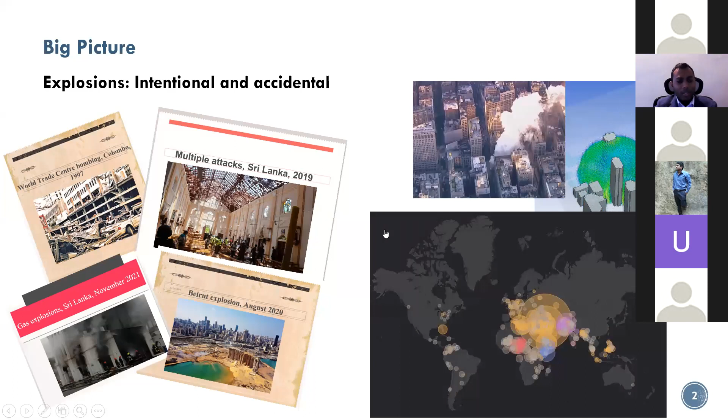For one thing, explosions have become a very common occurrence. Some of it is intentional and some of it is accidental. And us Sri Lankans are no strangers to both these types. I've just put some of the headlines of events we have experienced in Sri Lanka. Of course, the last one, the Beirut explosion, is abroad.

As a nation, we have experienced, in some cases, intentional attacks - carried out with the intention of causing harm to structures or to people. In other cases, there are accidental explosions that are not planned but could still cause significant damage. For example, some of these gas explosions we are hearing of nowadays are accidental, and also the Beirut explosion, based on what has been reported, was an accidental explosion as well.

So it can take either form, but as this video playing in the bottom right corner is suggesting, every year there are a lot of at least intentional attacks all around the world, causing serious fatalities to man.

Continuing with this idea of the big picture, it can cause serious damage to structures. These structures - when you think of blast, you might think this has to do with military structures. But as I told you in the previous slide, in today's world, blast engineering is not limited to military - it's very much a part of, if I could use the word, civilian life.

For example, the trains that we travel, once again, we have experiences in the past in Sri Lanka, and even some of the critical buildings, once again, not anything new to us. An explosion in one of these could cause serious injury to people, as well as catastrophic failure of structures.

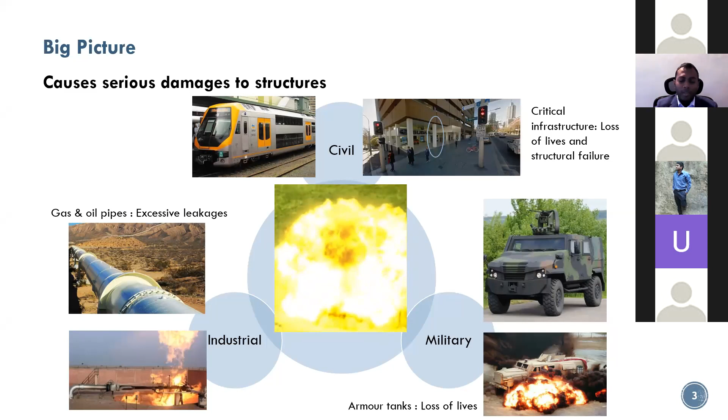So as you can see, if there's an explosion in any one of these structures, and of course the list can go on, it could be quite fatal, and it can cause serious damages to structures. And of course, it's not limited to structures. We as engineers, our main goal is to save humankind, and in doing so, we want our structures to be safe.

An explosion can cause serious fatalities to humans. Broadly speaking, we categorize the fatalities into two categories: primary and secondary. Primary is to do with the immediate explosion event, I'll explain what that is in the coming slides, whereas the secondary injuries could be some of the after effects of the explosion.

The primary injuries are the major concern, but even the secondary injuries can cause serious damage. This is not only limited to military applications, although the two photos I put on this slide are military related. If there were to be an explosion somewhere, the extent of it is not limited to the immediate vicinity - you can feel it further away. So that is why it is important to understand what's going on when the blast happens.

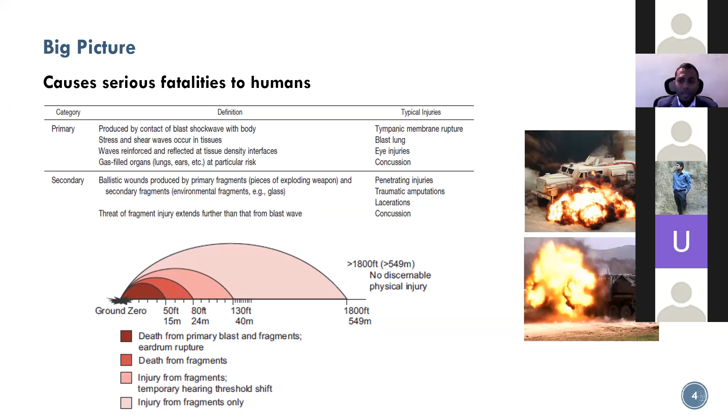To sum up this big picture, let me use an example of say a roadside bomb that could hit an armor vehicle. One thing that could happen is the structure - the armor vehicle itself can get damaged. This is the structural side of failure. Or the person or people inside the armor vehicle could be injured, or quite unfortunately could even be killed.

So there are two things we are mostly interested in when it comes to blast. One is the excessive pressure - there's a sudden rise in pressure when there's a blast, and that pressure can be felt by the people inside. That can cause harm to the people, and it can also cause harm to the structures. And secondly, there's a phenomena called scabbing, which is to do with damage to the structure.

When this happens, there could be particles that are ejected out of the structure, and those can act as high velocity projectiles - fragments that were not part of the initial blast event, but can contribute to the negative impact the blast could have. Both these aspects affect what's called traumatic brain injuries, commonly found in most soldiers, but even people exposed to blast can experience these conditions.

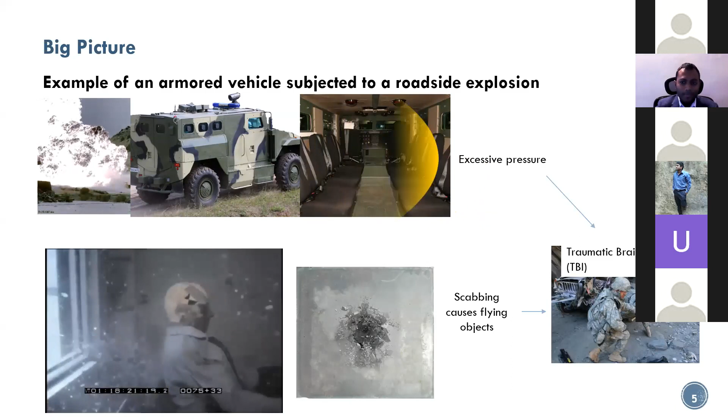From this point onwards, I'll be touching on that first point I mentioned about blast. So I'll be talking about how a blast occurs and what it can do.

Generally, the creation of a blast involves shock waves, sometimes referred to as blast waves - the terms are sometimes interchangeable. There's generally a violent change in pressure. Now, this is not only seen in blast - things like the three images I've given at the top also experience violent changes in pressure. But what we are dealing with in blast is a very unique situation. While all these things have that violent change in pressure as the common factor, what we see in blast is a very, very unique phenomena.

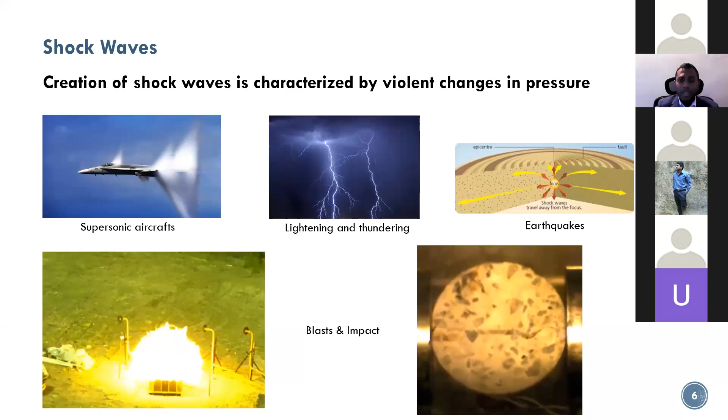So this is what happens in a blast basically. Firstly, there would be an explosion, or an ignition. Sometimes we use the word detonation. In the case of weaker explosives, we use the word deflagration. That just simply means that it starts. There is a blast.

The immediate thing that happens is there's an extreme rise in temperature and pressure. That's almost immediate, and it's very hard to even assign it a time. As you would see in the next slide, everything I've shown here in this flow chart happens within a matter of milliseconds. So it's very hard to assign a time to this.

So the sudden rise in temperature and pressure is then accompanied by the expansion of the gas. The air expands, and as a result, a layer of compressed air propagates outward. This is what we call the blast wave. So there's compressed air full of energy, at high pressure, that tries to move away from the source of the blast.

So this is what we call the positive phase, but this doesn't stay forever. There is a sudden rise, and then that effect decays. We say it decays exponentially, almost immediately. Because of the overexpansion of the air, there can be a reversal of the flow, and this is what we call the negative phase.

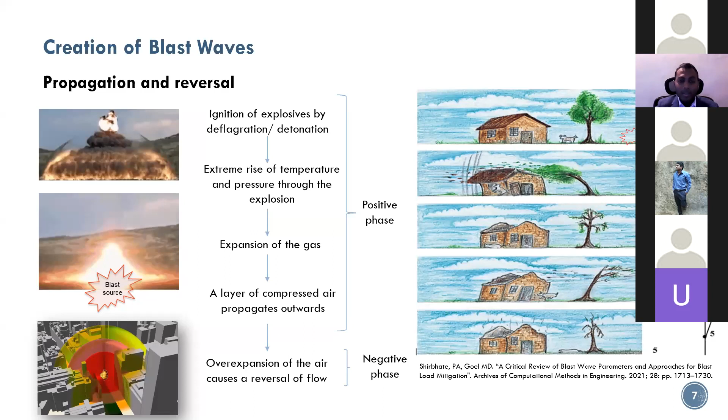So let me put that into a graph and bring in more engineering terms. Now I guess you have a fairly standard idea of what a blast can do. But now as engineers, if I can put that entire sequence of events into words: if there's a blast at some place, this is the pressure time history that you would see. The pressure is in kilopascals, with quite high values, and the time is in milliseconds. As I told you, this entire event happens within a matter of milliseconds.

So a couple of things that I want to highlight here. Before the blast occurs, what you have is the atmospheric pressure, or the ambient pressure. So for a few seconds prior to the explosion, everything's at that atmospheric pressure. And then there's a sudden rise.

On the horizontal axis, I call it the time of arrival. At a certain distance, within milliseconds, the blast wave arrives there. You can see in the simulation running in the left corner, that red contour, which is the high pressure, starts from the left-hand corner and propagates to the right. So if you think of a point in the middle of that figure, it will suddenly experience this rise in pressure, and that maximum pressure is what's called the peak incident pressure.

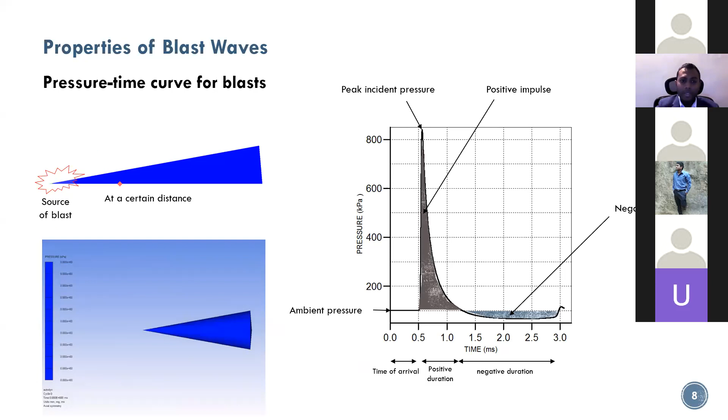Now this slide tells you - this is a real case. There are serious increases in pressure, and these are massive increases, depending on the quantity of the charge size as well. But one thing to do with blast that helps us is that with distance, there's a rapid reduction in that pressure rise.

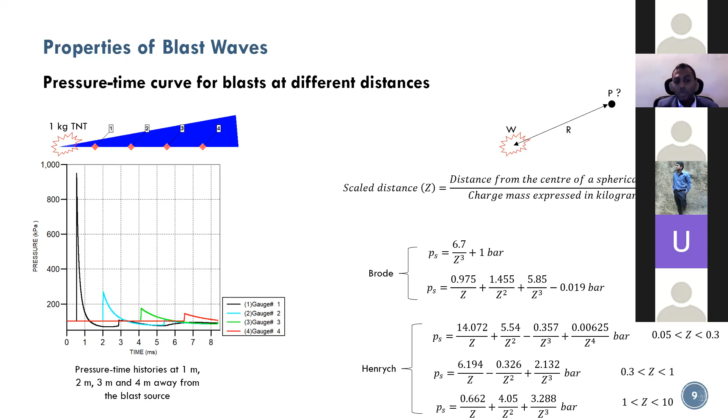So these equations are able to somewhat capture the effects of the pressure. Of course, there are shortcomings in these equations, but what I want to highlight in this slide is when there's a blast, there's a sudden rise in pressure, but the effect of it reduces or decays as you move away from the source of the blast.

If the previous peak incident pressure was bad enough, now this is worse, because reflections can sometimes be 8 to 10 times more than the incident pressure. In reality, unless the blast happens in no man's land, which is very rare, the effect of the reflections needs to be taken into account, and that can increase the pressure by several magnitudes. That's a critical thing we need to consider when thinking of a blast event.

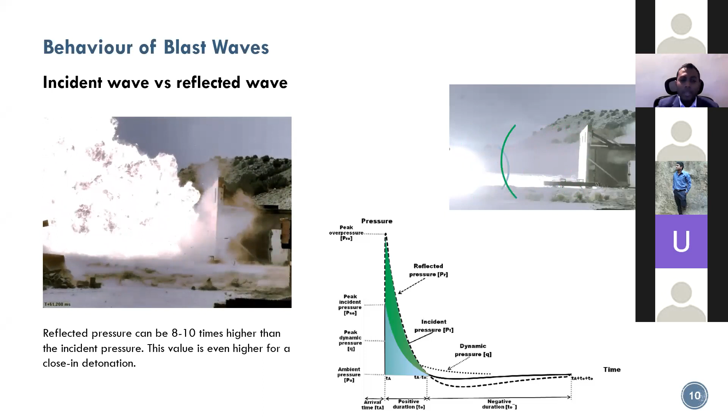So this is where the first part of it, the blast side of things, ends. I just wanted to give you a brief idea of what a blast is. My next area I want to touch on is how structures behave when there's a blast. I know there's a Q&A at the end, but if there's anything you want to clarify before I move on to the second part, I'm happy to do that now.

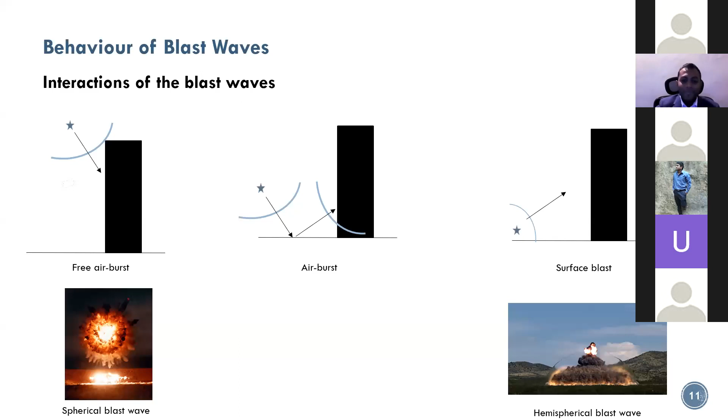By this point, you would have some idea of what happens when there's a blast. There's a sudden rise in pressure, but that pressure decays with distance. These are some of the key things we observe when there's a blast.

Now when it comes to structures, we've identified that there are pressures and impulses we can quantify during a blast event. So now we want to know how our structures behave when there's a blast event. To understand this, we first need to understand how materials behave during a blast, because structures are made of certain materials, whether concrete, steel, or any other kind of material. We need to understand what really happens inside a material if we have to accurately quantify the response of a structure.

Strain rate has units of 1 over seconds, or 1 over time. You can also explain it in terms of velocity divided by length for a given element. This is not generally used in static design because we don't have to deal with velocity in static design. Our load is static, as the word itself implies, so there's no effect of the strain rate.

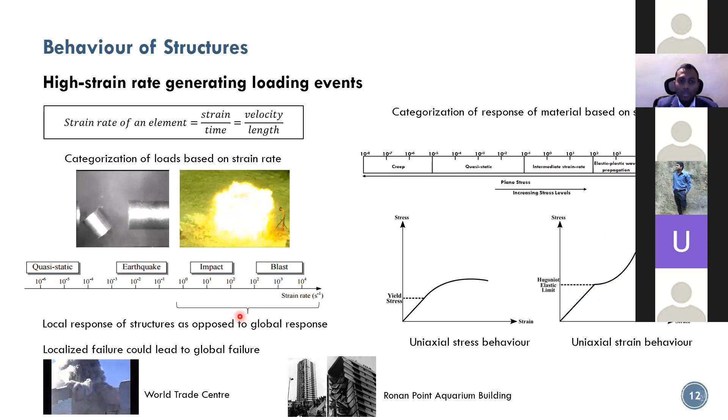This is something we commonly use for dynamic loads. Or we can use the energy theorems, because we know in a blast event there's energy that is dissipated as kinetic energy from the blast source, and this is absorbed as strain energy by the structure. By comparing the two, we can also do an analysis. But this is a very basic way of quantifying the structural response.

The question I want to leave with you all is: is this an oversimplification of the actual scenario? For one thing, we are simplifying the blast load—is this able to capture some of the complex ideas I told you earlier? Things like reflected pressure are very hard to quantify through this sort of model. This is where we actually need numerical simulations, finite element simulations, where we can model the blast event, simulate it, and see the full picture.

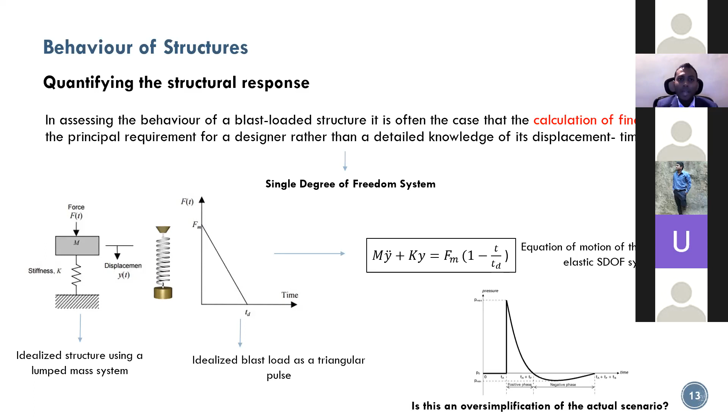Another key thing we want to know in terms of designing structures is how much structural protection we should offer a structure. Because there are two things about blast that make this idea of protecting structures very difficult for us. One is blasts are unpredictable. It's not like designing for static loads where we know the expected loads.

You can design the structure to resist, say, 1 kilogram of TNT, but the next day someone can carry 10 kilograms of TNT. So there's no guarantee that the structures we design are safe for any given blast scenario—the blast event itself is highly unpredictable. There's only so much we can do as engineers, so we need to accept that we can only offer a certain degree of protection, and we need to accept a certain degree of loss.

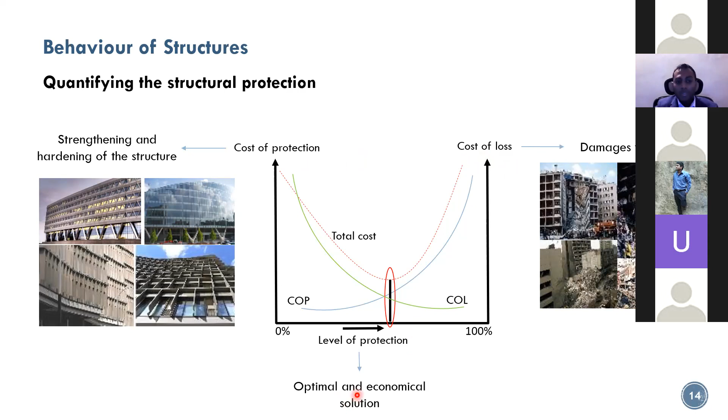We need to accept that there needs to be a certain degree of compromise between protection and loss, because there's no way we can offer full protection, nor can we allow full loss, since we are responsible for the structures we build. So it's important to quantify the level of protection we are going to offer to a given structure, and then we also need to quantify the structural integrity.

The resistance time relates to the natural period of vibration of the structure, and maybe even damping can come into play. So in this initial region, we are dealing with impulse, but as we go further away from the blast source, we are mostly interested in the pressure, because it acts for a longer time compared to the time it takes for the structure to resist it. This is important, because when doing a blast design, we need to know whether we're interested in the pressure or the impulse.

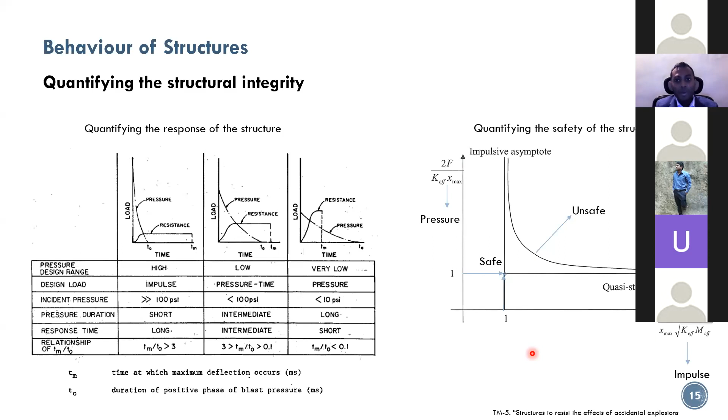So in terms of resisting, as I told you, I'll first deal with the traditional solutions. Now the idea of dealing with blast design is very important, as I've already explained the significance of it. So this slide is quite loaded with figures, but let me explain.

Generally, when dealing with blasts, you can broadly categorize structures into two types. One is barriers, where you expect the explosion to happen inside the structure, maybe because it is storing explosives, or, as with recent events in Sri Lanka, there may be gas explosions inside. So effectively, our structures are to be designed as barriers. When dealing with barriers, we are dealing with internal explosions, so there could be internal reflected pressures. We need to make sure we design our structures to resist that, and to this end we generally have this idea of vented structures when designing barriers.

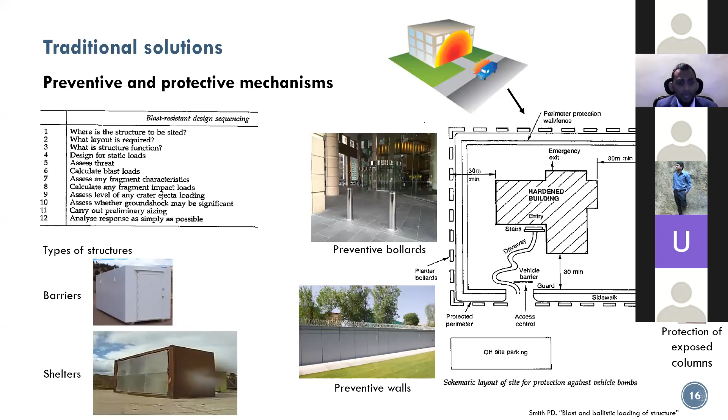So this is where I'm going to enter into reinforced concrete structures. We now understand that we need to decide what the function of the structure is, and the most commonly used material when it comes to building our structures is reinforced concrete. Generally for blast engineering, reinforced concrete structures are preferred - I'll show you why in one of the later slides.

Now the material behavior under blast loads is also very important. I showed you earlier the accurate description of the material behavior - it's the uniaxial strain condition, that's where the stress suddenly increases with the strain. So what that would mean is the strength properties of a material also increase with the blast load.

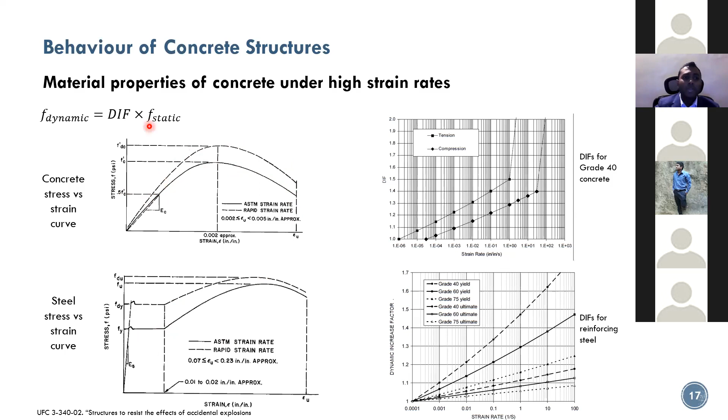This is for concrete. You can see that as the strain rate increases, it's called the strain rate effect of material behavior, the strength properties increase, and it's the same for reinforcing steel as well. So the properties increase, and we take that into account by using this DIF factor.

In terms of reinforced concrete design, when there's a blast load, the reinforced concrete element will try to absorb it. There's energy that is exerted onto the structure, and in the form of strain energy, the elements in the structure will absorb it. Under that, the elements will try to deform, so that is what you will get - you will get elements deforming.

Some level of deformation the structural element would be able to handle, but beyond a certain point, you might start seeing failures. We call those spalling failures, where they can be either partial or total failure. So in order to determine what's an acceptable level of deformation, we broadly categorize the rotation at the support - think of a simply supported beam, you get rotations at the support - and depending on the angle of rotation, we classify the kind of failures into three types.

The first type is where concrete is capable of handling the blast load on its own, as in the concrete as well as the reinforcement in it is able to handle the blast load. This is where if the blast load is small, it's able to handle it.

But if the blast load is more, if the angle of rotation is more than 2 and less than 5, the concrete will crush and it will not be effective in compression anymore. So we need both the tension and the compression reinforcement to carry that kind of deformation in the concrete.

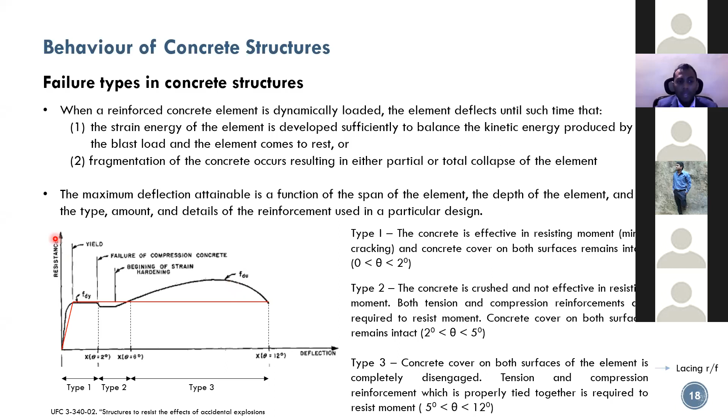So for shear reinforcement, generally we have the single hook shear reinforcement if the blast load is from one side, but if we're expecting blast loads from both sides, then we need hooks on both sides to make sure we don't create any failure planes.

But now this idea of lacing reinforcement is like a spiral that connects our flexural reinforcement. So this is a stronger connection between our flexural, the tension and compression reinforcement, than the shear reinforcement. You will get this for both the longitudinal and transverse reinforcement. So lacing is a very important aspect if you're designing blast resistant structures using reinforced concrete.

So generally for blast resistant structures, we use either grade 30 concrete or higher. In terms of reinforcement, generally we use at least T12 or higher. So in terms of resisting itself, the shear or the lacing reinforcement plays a critical role.

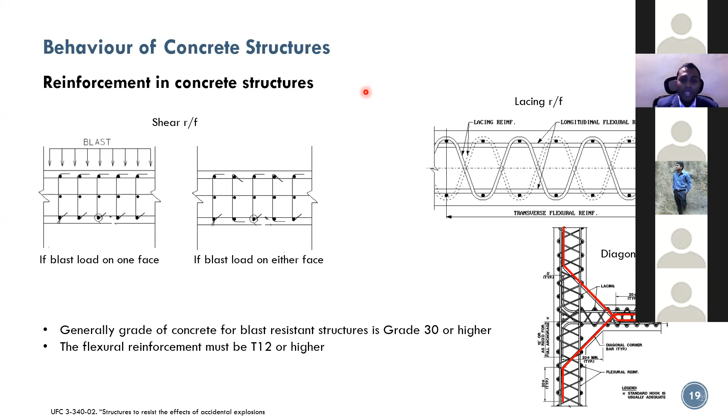Now when you're thinking of steel structures, I've given a list of shortcomings of steel structures compared to concrete structures. Generally, if you're given the option of choosing between reinforced concrete and steel to design a structure to resist blast, more often than not, you would go for a reinforced concrete structure for several reasons.

Generally, for close-in loads, the steel will not be able to handle it, and also things like melting come into play. And generally in reinforced concrete design, you can do separate designs for bending, shear and torsion, whereas in steel, all that is combined into one design.

And in designing the sections, generally we go for slender sections in steel, so you will get local instabilities and buckling that can cause serious effects. And also the joints, generally either welded or bolted, so those joints may not be as strong as some of our reinforced concrete joints that are heavily reinforced.

Because of that, generally you will find steel not as the entire structural element, but as certain parts of a structure, for example as a door. So when you're only fabricating parts using steel, you are able to control the properties and come up with a structure that can resist.

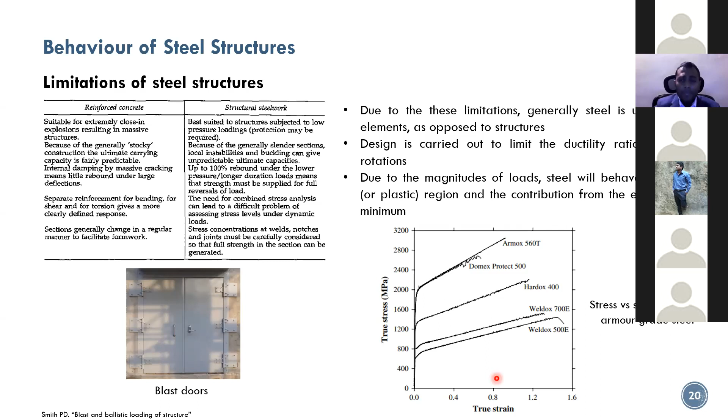So to wrap up the presentation from this point, this is the last bit where I'll present some of the more innovative methods of enhancing the structural resistance of structures expected to undergo blast loads. This is directly from the work of my thesis.

Okay, I have a question. If it's okay, I'll soon answer that. Will the ductility or brittleness affect the behavior of structure during blast?

Yeah, it plays a very significant role. I might explain that more in the coming slides with this idea of my thesis. You need ductility basically. Enhancing the reinforcement in reinforced concrete is a way of enhancing the ductility. Generally, the expectation is that you let the structure deform because there's a high level of kinetic energy exerted from the blast onto a structure. There'll be a lot of strain energy that the structure will have to undergo. So you have to let the structure deform. When there's significant energy, you need to let it deform. So if you want it to deform without failing, then you need ductility, because if not, it's brittle, and you will have catastrophic failures. So ductility plays a significant role.

So coming back to this slide, what I proposed in my thesis was a multi-layered system or a multi-material system. The inspiration for that is, of course, you see multi-materials and multi-layers in nature. Almost most of the things we see in nature are either multi-layered or multi-material. The materials are arranged in a certain way that allows it to fulfill a certain function.

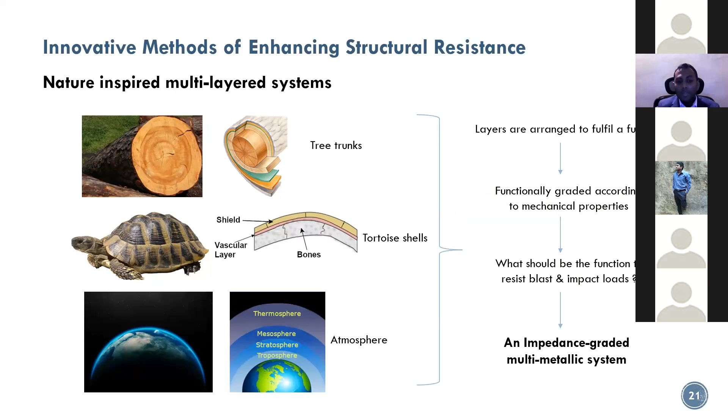So what I proposed was an impedance graded system. This property, impedance, is to do with the density times the wave propagation speed. Density is something we know, and wave propagation is that idea I explained a few slides earlier. Now, when we are dealing with blast loads, we need to think of it as the structure getting loaded in the form of waves that propagate through the structure.

Not all the rays emitted by the sun reach the earth. Some of it reaches the ground, some gets transmitted, some gets reflected. That's to do with the properties of the different layers we find in the atmosphere. Similarly, if you design the system so that the impedance reduces through the thickness, we can cause some of the stress waves to reflect, so only part gets transmitted. This way we can reduce the magnitude of the stresses that a structure would experience.

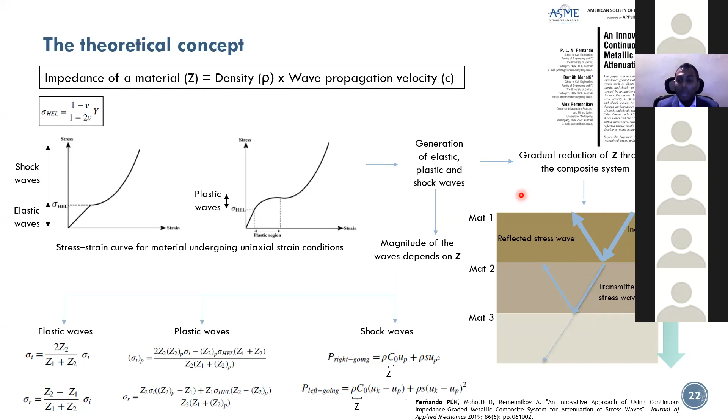So to maintain high impedance reductions within the system, you can significantly reduce the transmitted stresses onto a structure, but it comes at a cost. It has to reflect stresses at each joint, and these reflected stresses can cause delamination between the multi-materials. So when you have more than one material in a system, you are susceptible to delamination. To avoid that, we need to strike the right balance between how much we want to transmit and how much we want to reflect.

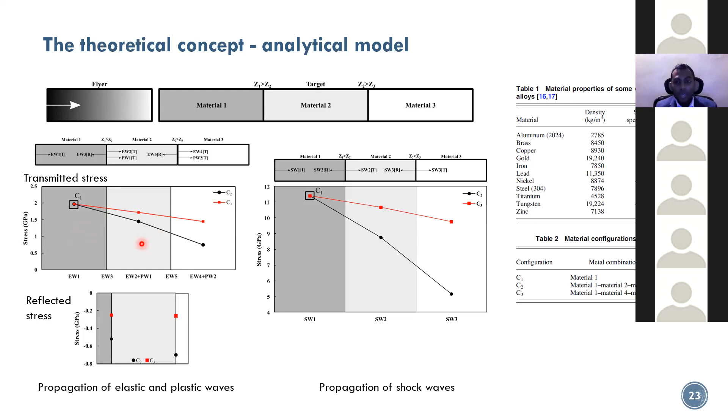This was the basic concept that I proposed in the PhD, specifically in relation to blasts. To test this idea, we have to fabricate a multi-metallic system consisting of steel, titanium, and aluminium.

Welding is the way we generally connect materials, but the standard way is fusion welding. That won't do because these are different materials with different mechanical and thermal properties, so welding different materials is not an easy task. We had to propose this rather innovative method called explosive welding.

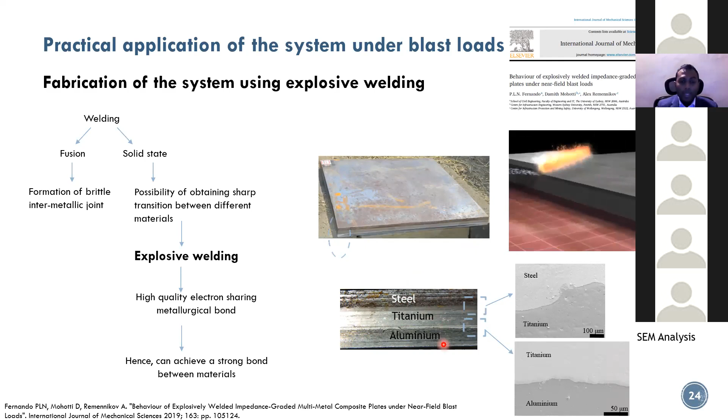If you want to connect the steel to the titanium plate, you place the titanium plate at the bottom, the steel at the top at a slight inclination, and cause an explosion at the top of the steel plate. As you can see in the video, without melting, because of the explosion, the steel hits onto the titanium. In that impact zone, a jet forms and moves away from the source of the explosion, causing the surfaces to peel and bond well. This was the new material system we came up with using this technique.

We then tested that for two kinds of charges. One was for contact charges, where the charge source is almost in touch with the material. We first tested a steel plate, the reference one, and then tested the new multi-material system plate.

When we had a steel plate at the back surface, we saw scabbing - I explained what scabbing is earlier - this is where, because of tensile failures, material gets ejected out of the system at the back face. We saw scabbing in the monolithic steel plate, but when combined in the multi-material system, we didn't really see that.

We saw a small rupture by shearing, but that was because the aluminium we used as the back material was slightly weak. If we actually use a stronger grade of aluminium, we would have been able to prevent the damage, as you can see in the second figure.

If you compare this with what you see here, this new material system has been able to withstand the blast load. It has deformed - obviously it deforms, this is where the ductility comes into play. You can see significant deformation; you cannot avoid that, but it does not fail. Generally, when it deals with blast load, it's when the structures fail that we start to get worried.

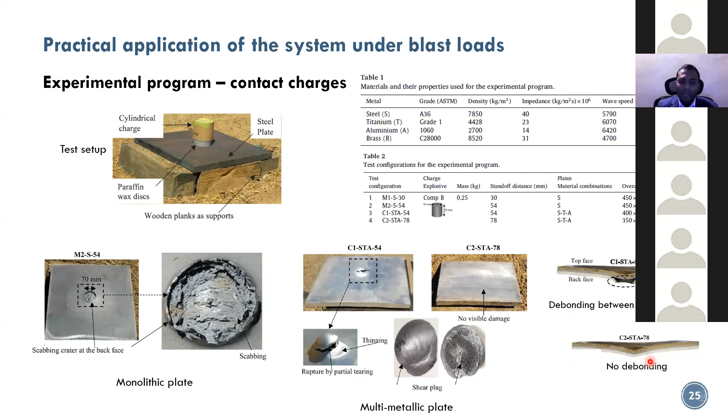We also tested it when the blast source was slightly away, about 250 millimeters away from the plate, and this way, of course, the damage is much less.

The significance of this is that when we use simple quantification methods like the single degree of freedom system, you are not able to capture all this - you'll just get one final answer, maybe the maximum deflection or the residual deflection. But in reality, when there's a blast, there's more going on than just the extreme values.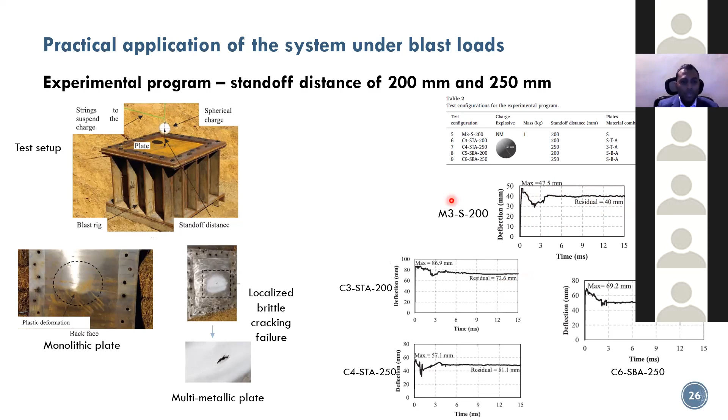So modeling it this way allows you to identify the pressure variations in the air as well as the deflection of the plate. You can get something similar to what the experiments gave you. If I plotted the deflection variation of the plate using this model, we got something similar to what the experiments gave.

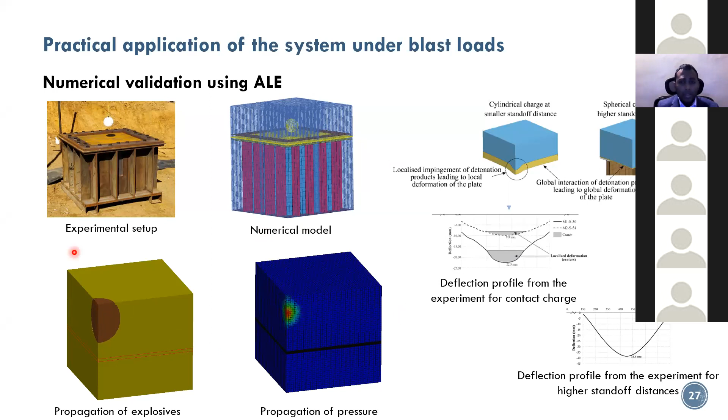So what this system does, IGMM is the impedance graded multimetallic system. What this allows you to do, compared to only having a single material, is what's called attenuating - reducing the magnitude of the stresses that get transmitted. So when you create barriers in a system, you can reduce the stress that gets transmitted.

By doing that, we are preventing any major kind of failure. Spalling is the critical failure in these cases. Spalling is effectively a tensile failure, to do with the tensile stresses that get developed generally towards the back face, the face away from the blast. So what we are doing here is reducing the stress gradually through the system, so that by the time you get to the last material, the stresses have reduced significantly to the extent that you will not get tensile failure.

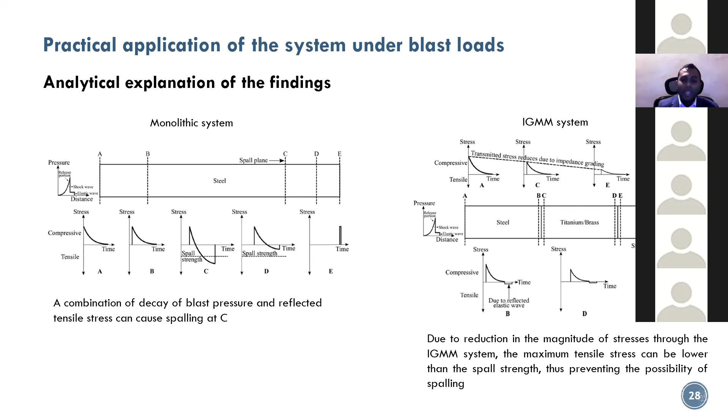Another way of enhancing the effectiveness of steel to resist blast is using polymer or polyurea. There was another experimental program done where polyurea coated steel plates were tested for the same blast setup. We did a set of tests with polyurea at the front of the plate and then polyurea at the back of the plate. Having it at the back of the plate was more effective for the reasons I've given here.

Of course, introducing a new material into the system would mean that your weight increases, but when you plot the gain in terms of reduction in deflection against the gain in terms of density, within a certain region, polyurea is able to show beneficial action when it's used with steel plates.

So that is another way of making sure our steel structures are safe. Existing steel structures, you can add polyurea layers to it. That's like a retrofitting technique, where we can make sure we enhance the resistance of structures.

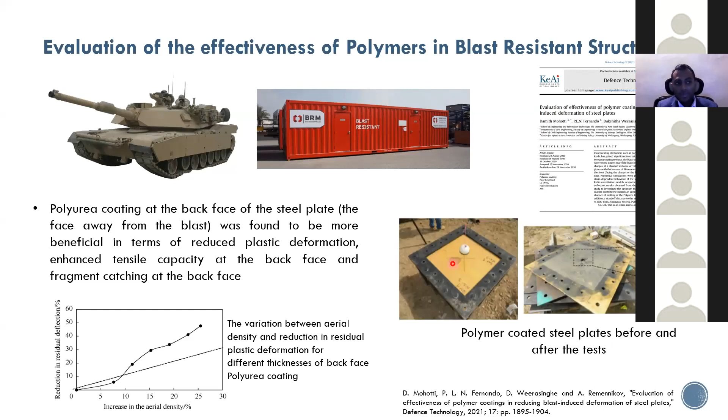So in conclusion, I've listed a couple of conclusions based on the three aspects I covered. The first aspect was what is a blast - it's highly unpredictable and very intense, which means it's a very challenging type of load to deal with, and its unpredictability is a serious concern for engineers. But within a certain theoretical framework, we have a fair bit of understanding of how the blast load works.

The second aspect I touched was how our structures react, or what's the response of structures when there's a blast. My conclusion is that we need to consider a holistic design approach. The design for blast needs to be incorporated very early in the design stage. It can't be an afterthought - it has to be part of a broader design process that needs to be incorporated.

And also in terms of resisting, this is the question I answered as well - it's through enhanced ductility that our structures resist blast. We allow it to deform, but we don't let it fail, so we need ductility for that. In line with that, some of the work I presented from my PhD is related to that, where we increase the ductility through an impedance graded system.

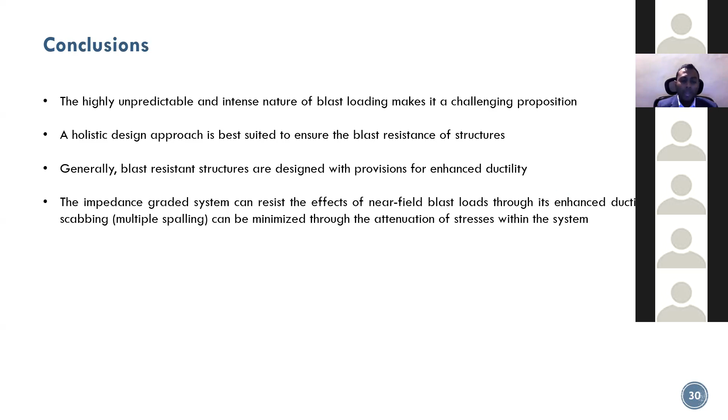I would like to acknowledge a few people, Dr. Damith Mohotti, my PhD supervisor, who introduced me to this very interesting area of dynamic loads. Most of the latter half of the work I presented here was for my PhD, so I'm grateful for all his supervision. I also thank the co-authors of some of the papers we published, the respective universities who helped with some of the experimental work, and my research colleagues at the University of Sydney who were part of this work. Once again, thank you for the opportunity to present this work in this forum, and thank you.